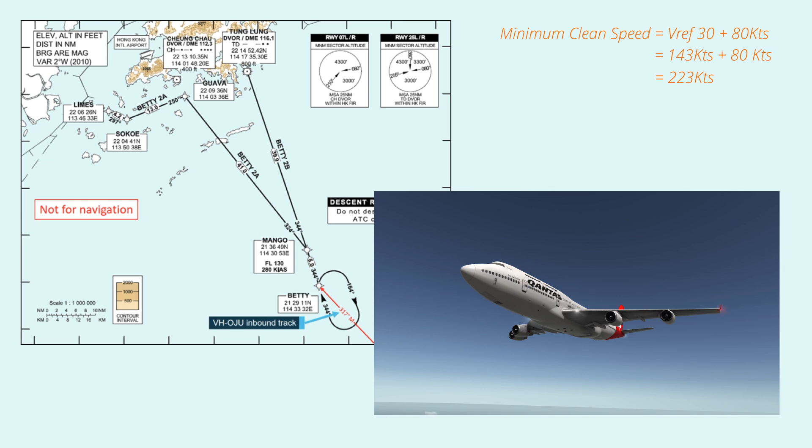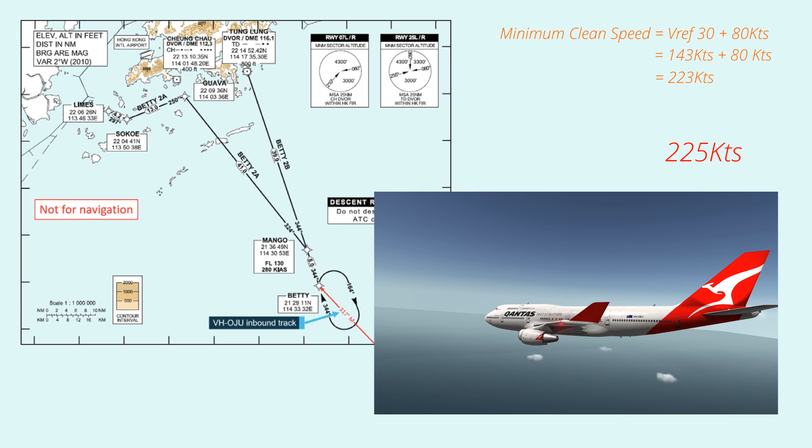With confidence therefore in the figures being displayed, the captain will subsequently instruct the FO to simply round the figures off and manually override the 223 knot figure with an intended hold figure of 225. This manual overriding of the FMC predictions is significant, as it instructs the aircraft to use this figure as its primary speed reference, even if subsequent events will cause the FMC to amend its initial calculations. And as luck would have it today, this is exactly what will happen to QF29.

Due to the congestion ahead, the descent from flight level 300 will be laboured and stepped. The significance here is that as the aircraft approaches the Betty intersection, while anticipating an entry into the hold at flight level 160, the aircraft will actually be 6,000 feet higher at flight level 220.

In preparation for landing, following direction from the flight crew, the customer service manager will advise the passengers to fasten seatbelts. However, of significance is the fact that at this time, the fasten seatbelt sign will not actually be illuminated.

As can be seen from the diagram, the published hold will require the aircraft to establish in a right-hand racetrack pattern, establishing inbound to the fix on a track of 344 degrees magnetic. At lower altitudes, this inbound leg is calculated by the onboard flight management computer to be 1 minute long. However, at intermediate and upper levels, this is extended to 1.5 minutes.

The aircraft will level at 220 as instructed and commence its right-hand turn to enter and maintain the given holding pattern. Almost as soon as it does so, events on the flight deck will take a turn for the worst, as various stall warning, aural and tactile alerts will begin to trigger. From a normal, uneventful descent scenario, the aircraft is now on the cusp of entering an aerodynamic stall and uncontrolled flight. But why?

The purpose of the stick shaker device is to provide warning to the flight crew that the aircraft is approaching an aerodynamic stall. As you've already seen, when activated, the stick shaker vibrates both control columns, providing an aural and tactile warning indication. The manufacturer's guidelines for recovery from such situations is outlined here and must be executed without delay by the respective crew member.

With first indication of the stall, the pilot flying, or the PF, will initiate recovery by holding the control column firmly, disengaging both autopilot and auto throttle, and smoothly applying nose down elevator in order to reduce the angle of attack until buffet or stick shaker stops. At the same time, the PM, or the pilot monitoring, will monitor altitude and airspeed, verify all required actions have been carried out, and call out any omissions.

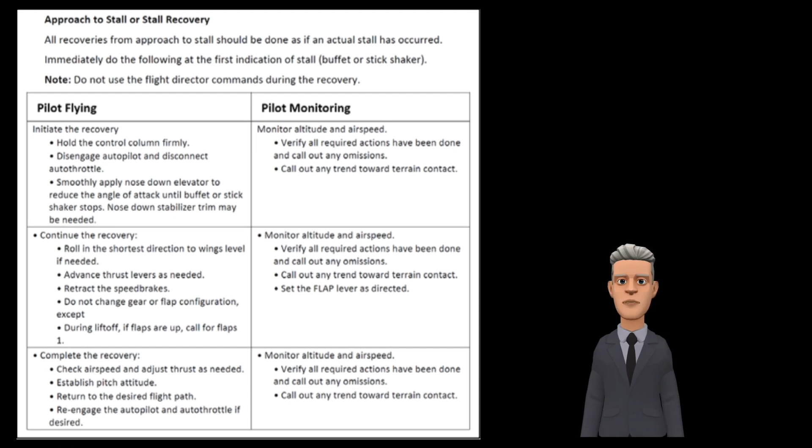Continuing with the recovery, the PF will roll the aircraft the shortest way to wings level, advance thrust levers as needed, and retract the speed brakes. He will also ensure that the current configuration with regard to flap and gear is not altered, in order to mitigate against the possibility of inadvertent drag increase. In completion of the recovery, the PF will check airspeed and adjust thrust as necessary, re-establish a positive pitch attitude while returning to the desired flight path, and finally re-engage automation as appropriate. Throughout, the PM will continue to monitor and call out any trend towards terrain contact.

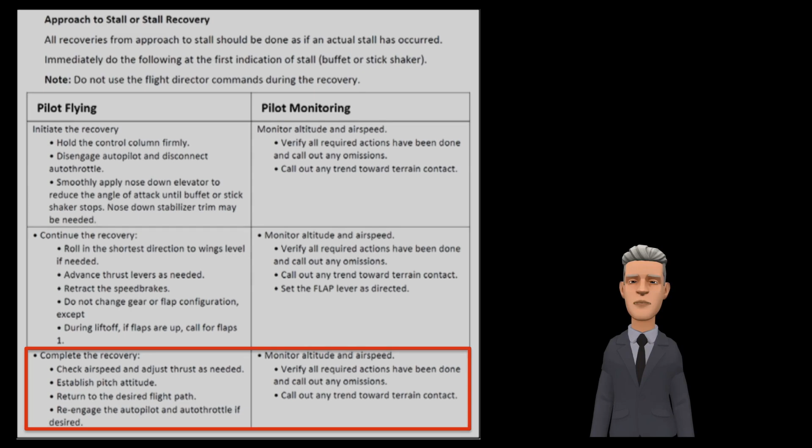During the pilot-induced oscillations, the customer service manager, who will be standing in the left aisle in the vicinity of row 64, will strike the cabin ceiling before falling on a seat armrest, sustaining injuries. 5 other cabin crew members in the aft of the cabin will likewise strike the ceiling. A passenger located in the aft lavatory will also strike the cabin ceiling before landing on the lavatory seat, this resulting in minor injuries to the passenger and damage to the lavatory fittings themselves.

A passenger in seat 63 Charlie, who will not have her seatbelt fastened, will also be injured. As the aircraft tracks on the outbound leg of the holding pattern, the smoke alarm in the damaged lavatory will activate. Upon investigation, the cabin crew will establish that there will be no evidence of smoke, fire or fumes, and that their belief is that the alarm is false, most probably activated by the damage to the lavatory itself.

As a result of their experience, the captain will request a priority landing from ATC, who in turn will immediately clear the flight direct to Hong Kong International Airport. With the remainder of the descent, this lavatory smoke alarm will activate on a further 6 occasions.

So what had happened to QF29 to so quickly bring it from a normal descent scenario to the point of it entering an aerodynamic stall and uncontrolled flight? Well, the answer is exactly that: aerodynamics. As an aircraft moves through the environment from the smallest to the largest, 4 specific forces act upon it.

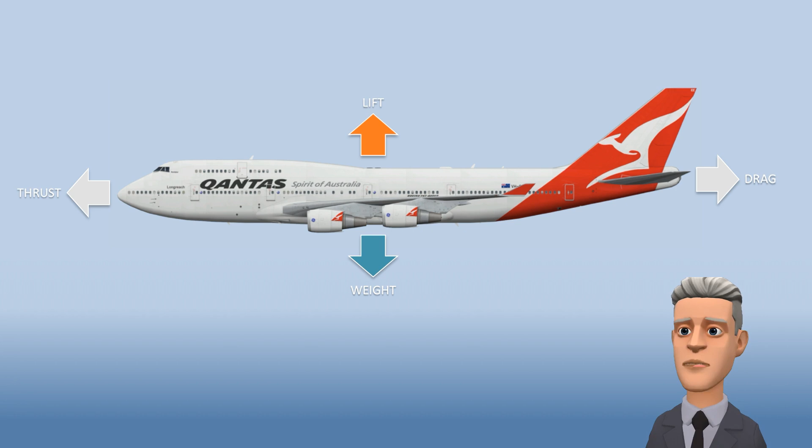When an aircraft is flying straight and level at a constant speed, the lift it produces balances its weight, and the thrust it produces balances its drag. However, this balance of forces changes as the airplane climbs and descends, as it speeds up and slows down, and, of particular interest to our study of QANTAS 29, as the aircraft turns.

In order to understand exactly what's about to happen to QF29, we need to explain a little more of the aircraft's aerodynamic model in the context of 2 significant events. Firstly, as the aircraft levels off from its descent, and secondly, having levelled off, what happens as the aircraft enters the right-hand turn to join the holding pattern. As we've already explained, in order to maintain level flight, the lift and weight vectors will have to be in equilibrium, which by definition isn't the case during descent. So as the aircraft levels off, this lift vector will have to be increased.

But how? Lift itself is expressed mathematically as being equal to a half rho v squared S CL, where rho equals the density of the air, v the velocity of the aircraft, S the surface area of the wing, and CL the lift coefficient of the aerofoil. Density, velocity and surface area pretty much speak for themselves, whereas CL, representing the lift coefficient of the wing, is a variable comprising of details relating to the shape of the aerofoil and, importantly, the angle of attack, or the specific placement of the aerofoil to the relative airflow.

In the given example of QF29, if the aircraft had actually levelled at the anticipated flight level of 160, the combination of holding at 225 knots plus an acceptable angle of attack would have produced the required lift to balance the weight vector, given the known density of the atmosphere at that level. However, the fact that the aircraft now enters the hold at flight level 220 means that the density of the environment will be significantly less, and thus the remaining variables of V, S and CL will have to be amended in order to compensate for its reduced value.

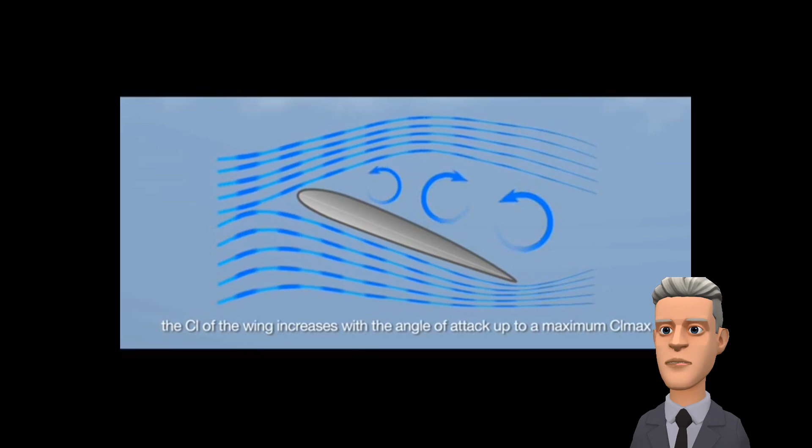As the angle of attack is increased, the CL, or the lift being generated by the airfoil, will also increase, up to a point. The angle at which this relationship fails is called the critical angle of attack, or CL max. Increase in angle of attack above this critical value and the airflow simply cannot remain attached to the wing surface. As the angle of attack increases, for a considerable period there is a linear increase in the value of CL. Approaching CL max, however, as the airflow begins to separate, the slope of the graph shallows.

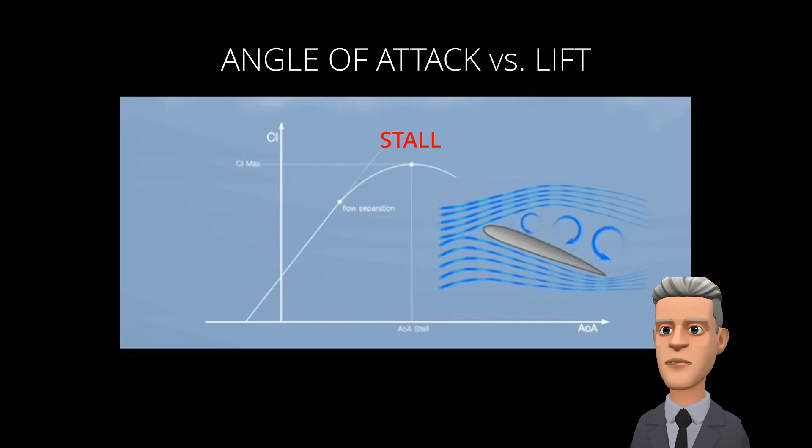At CL max, the lift being generated has reached a maximum. Any increase in angle of attack beyond this value will result in a sharp drop-off in lift with a corresponding increase in drag. The wing is now stalled. In order to recover from a stall, the angle of attack must be reduced to a value below the critical value of CL max in order that this separated flow can be reattached.

So as QF29 levels off at flight level 220, in reality the true correct holding speed should be 20 knots faster at 243 knots. Thus, due to the aircraft's slower speed, the angle of attack is being forced to climb ever higher, all the time reducing the remaining margin to CL max.

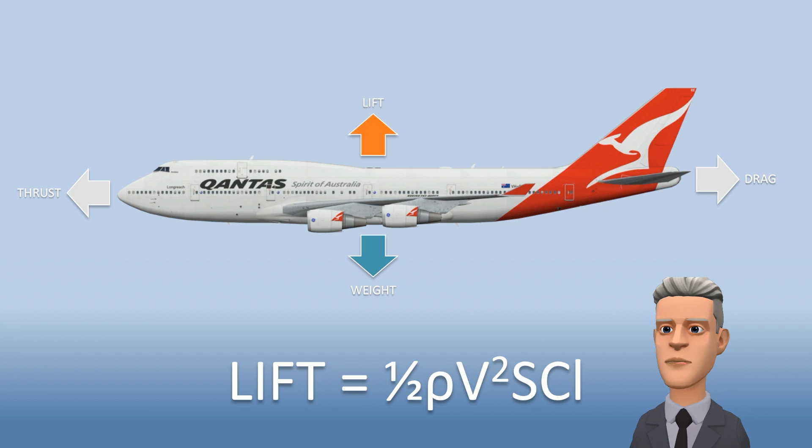Were the aircraft to continue straight and level, this compensation for the slow speed would most likely have gone unnoticed, but remember, this isn't what QF29 has been instructed to do. And it is its subsequent roll to the right which brings the aircraft to the edge.

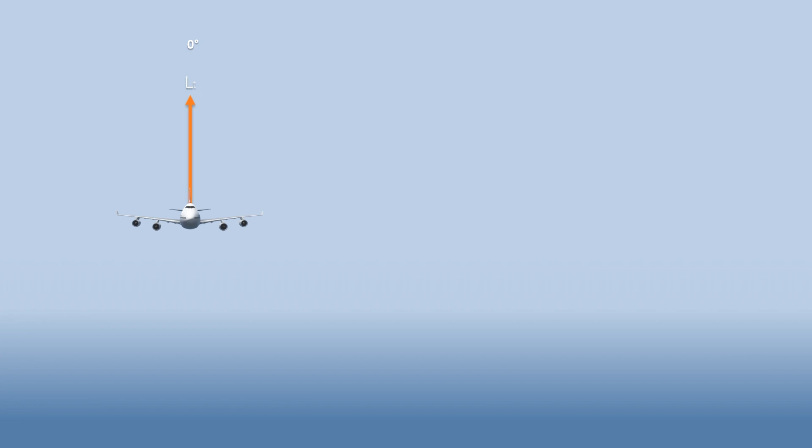As we've just stated, in level flight the total lift produced by the wings, shown here as the force Lt, balances the effect gravity is having on the mass of the aircraft, namely its weight, represented by Wt. So far so good. Now as the aircraft begins to turn, the total lift vector Lt will be orientated out of the vertical. One way to think of this is that the total lift vector will always act in a direction which is a straight line from the pilot's feet through his head.

Although moved out of the vertical plane, a residual lift vector will still remain. We'll indicate that here as LR. It is this resultant vector which is left to continue the job of trying to balance the weight vector Wt. Looking at the examples presented, it can be clearly seen that the more the total lift vector is orientated out of the vertical, the greater the impact on the residual vector. In other words, the more the pilot banks the aircraft, the weaker the residual vector becomes.

Needless to say, as the residual vector weakens, it will prove unable to adequately oppose and support the weight of the aircraft, and so, without intervention from the pilot, the aircraft will descend. So the question is, assuming that this descent is undesirable, as would most definitely be the case in a holding pattern, what can be done to compensate?

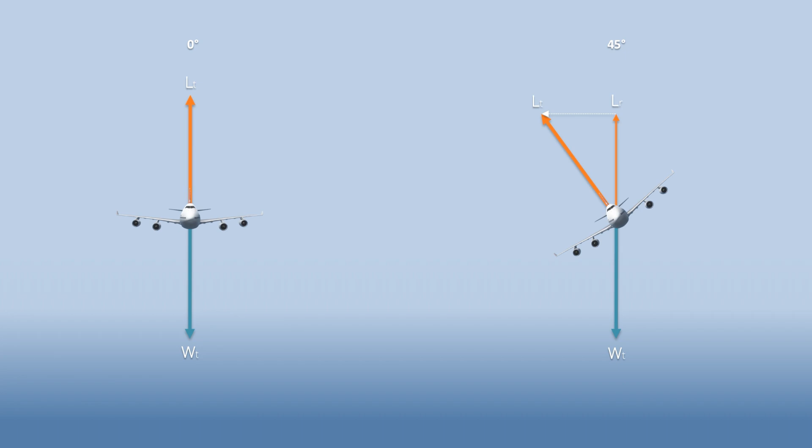Well, our problem is this. In order for the aircraft on the right to maintain level flight while in the turn, the value of LR will have to increase in order to balance the aircraft's weight. However, as LR is dependent on LT, what we really have to do is increase the value of LT, the overall total lift being produced by the wing. So how do we actually do that?

Well, back to the lift equation one more time. If our objective is to increase the total lift value, in order that LR correspondingly increases, then one or more of these variables within the lift equation must likewise change. But which ones? Simply rolling the aircraft into the turn from straight and level flight will do nothing to affect the density of the air through which the aircraft is travelling. Therefore, rho remains a constant.

We've already established that the speed of the aircraft has been fixed by the crew at 225 knots. And as there has been no extension of the leading edge or trailing edge devices, the area of the wing will have not changed either. Thus S will also remain a constant. Therefore, once again, the only remaining variable to play with in order to increase the total lift being produced is CL, or in other words, a change to the angle of attack.

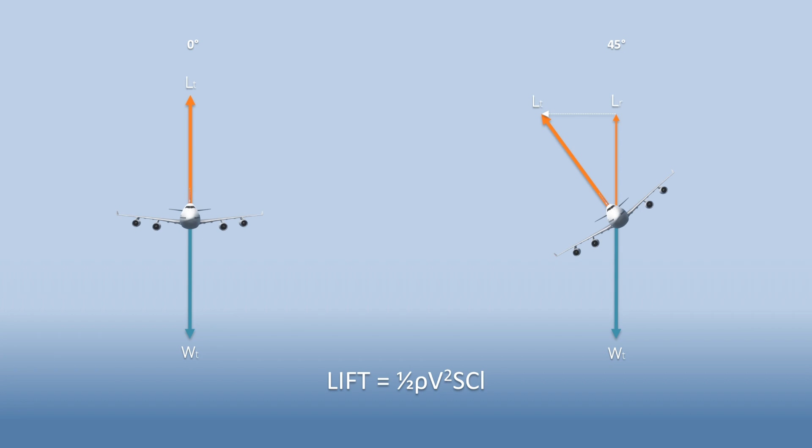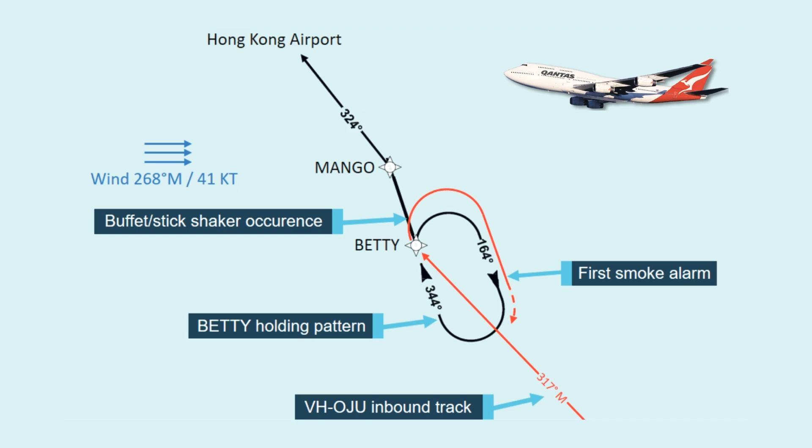Simultaneously, as the aircraft descends toward Betty, with both pilots being simultaneously distracted, neither will notice that the aircraft's speed will have reduced below the already slow target of 225 knots. This will thus reduce the v-squared element of the lift equation, forcing the CL component to compensate still further by continuing to adjust the angle of attack value upward. What slender margin remained beforehand to CL max will now have all but disappeared.

So again, to recap, if we mathematically display lift as being equal to a half rho v squared S CL, then 5 specific events collectively will conspire to bring QF29 to the brink. Firstly, the crew's manual insertion of a target speed of 225 knots was in itself not wrong, provided the aircraft was actually going to enter the holding pattern at flight level 160. At flight level 220, however, the reduction in the air density meant that in order for the angle of attack to be maintained at a reasonable level, with an adequate margin to the critical value of CL max, then the value of V, or the aircraft speed, would have to be correspondingly increased.

The FMC calculated target hold speed and target level are based on the aircraft's gross weight and programmed VNAV descent profile. Below flight level 150, this speed is based upon the flap 30 landing reference speed, with the addition of a speed increment. This increment varies with aircraft weight and is designed to provide a manoeuvring margin equivalent to a level turn at 40 degrees angle of bank, or 1.3 g of vertical acceleration. Above flight level 200, the FMC calculated hold speed corresponds to the minimum drag or most fuel efficient speed. Therefore, at flight level 220, calculations showed that the optimum holding pattern airspeed would have been approximately 240 knots based upon the event gross weight and not the 225 knots inserted by the crew.

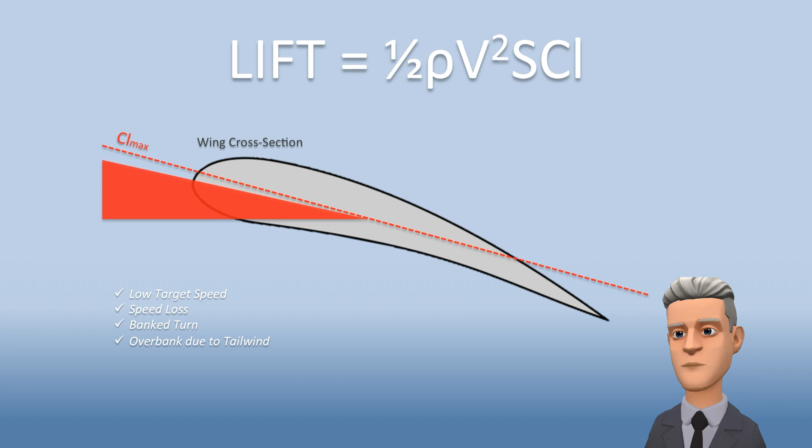Entering the turn, for the reasons mentioned earlier, the angle of attack will have to be still further increased in order to compensate for the reduction in the residual lift vector, as the total lift vector is orientated out of the vertical, proportional to the degree of roll. The effect of the sudden increase in tailwind component as QF29 commences its right-hand turn will cause the autopilot to deliberately overbank the aircraft so as to mitigate the possibility of the aircraft departing the protected airspace of the holding pattern. This again weakens the magnitude of the residual lift vector, placing still further pressure on the angle of attack being flown.

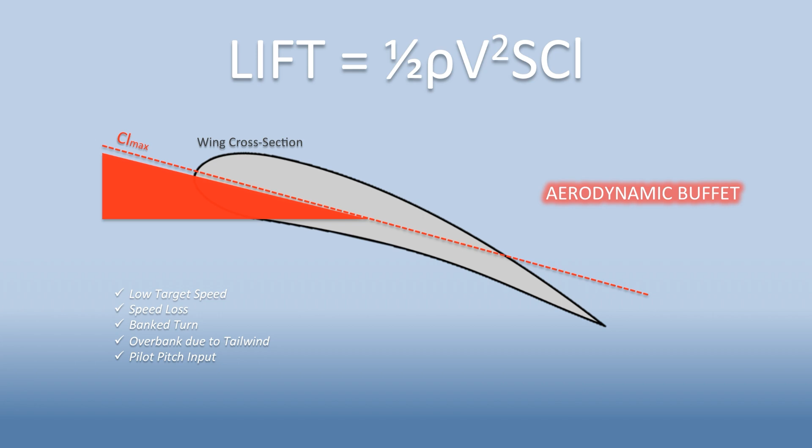As the margin to CL max is reduced, the airflow over the wing is beginning to separate, resulting in aerodynamic buffeting which can be felt inside the aircraft. Finally, in an effort to prevent further altitude loss, the captain's pitch up inputs on the yoke will reduce the margin to the critical angle of attack still further, finally triggering activation of the stick shaker.

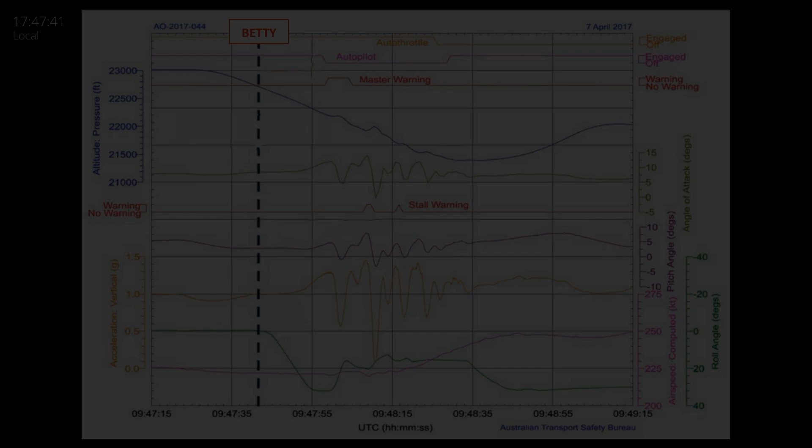Analysis of the flight data recorder will show that crossing the Betty waypoint and a commencement of the right-hand turn into the holding pattern, the aircraft was still descending and passing flight level 227 with an indicated airspeed of 224 knots. Due to the effect of the rapidly increasing tailwind component, for the reasons mentioned earlier, the autopilot commanded a bank turn of 32 degrees, far greater than the 25 degrees which would have been expected.

14 seconds later, a simultaneous increase in vertical acceleration, pitch and angle of attack can be observed as the autopilot attempts to level the aircraft to flight level 220. Due to the resultant increase in drag and the lethargic reaction of the autothrottle, the indicated airspeed decreases still further. This results in the generation of the airspeed low, master caution, and the simultaneous onset of pre-aerodynamic stall buffeting.

In response, the captain will disconnect the autopilot while simultaneously applying forward pressure on the yoke to reduce pitch and left aileron to reduce the aircraft's bank angle. In reducing the aircraft's pitch, this input will also have the effect of reducing both the vertical acceleration and angle of attack.

Noting that with the autopilot disconnected, the aircraft had continued to descend, the captain attempted to mitigate further altitude loss by reapplying back pressure to the control column, and as a result all three parameters of pitch, vertical acceleration and angle of attack increased once again. This finally brought the angle of attack to a value which resulted in the stick shaker being activated.

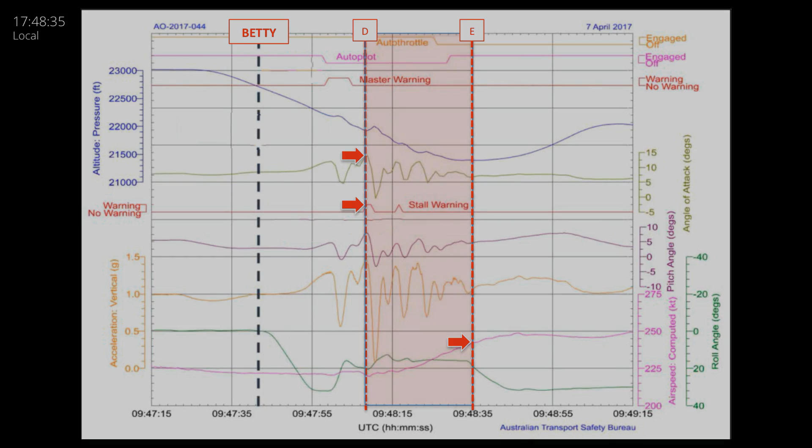Prior to arriving at Betty, the vertical profile in the flight management computer calculated holding at between flight level 150 and 160. When selecting a target speed, the flight crew verified the FMC calculated speed using the established rule of thumb. However, the flight crew training manual for the 747 advised that the computed holding speed, being presented under the given circumstances, would only provide for full manoeuvre capability to the stall warning activation at lower altitudes only, by definition this being below flight level 200 or 20,000 feet.

It transpired that the flight crew were not aware of the requirement to use a different verification procedure for altitudes above flight level 200. Had the crew recalculated the hold speed for flight level 220 using the flight management computer, it would have provided a target hold speed of 240 knots.

In this case, the flight crew likely did not have an adequate understanding of how the FMC calculated the target hold speed. They also did not understand the use of the best speed option provided for on the hold page of the FMC. The truth was that had they used the available best speed option, the FMC would have provided them with a hold speed for the actual aircraft weight, altitude and configuration at the time. This would have immediately highlighted a disparity between what should have been flown, that is 240 knots, and what was actually about to be flown, that being the 225 knots which the crew had previously manually inserted.

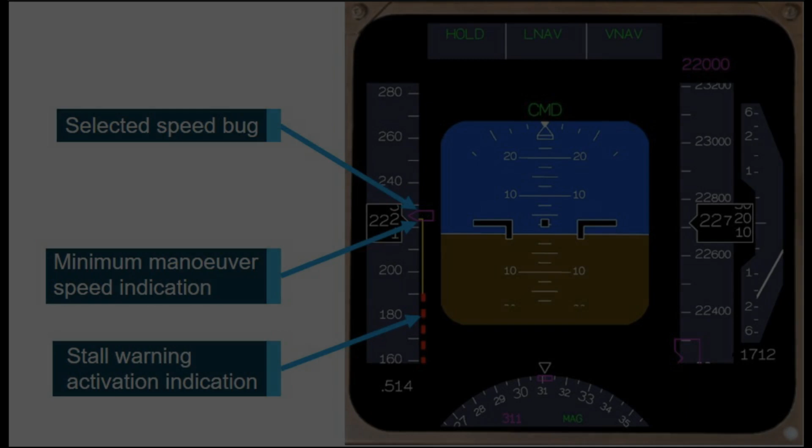At the time the speed was reducing below both the selected speed and the minimum manoeuvring speed, the flight crew's attention was focused elsewhere on other operational matters. The captain was busy reviewing the relevant navigation charts for their eventual approach into Hong Kong, while the first officer was actually engaged with looking outside of the cockpit for potential conflicting traffic as they entered the holding pattern.

As QF29 made the right-hand turn to enter the holding pattern, the bank angle increased, exaggerated by the effect of the prevailing wind, and the aircraft began to transition from descent to level flight. The accumulative effect of these manoeuvres increased both the aircraft's vertical acceleration and wing angle of attack, which in turn initiated pre-aerodynamic stall buffeting. At this time, although it was not captured on the flight data recorder, all flight crew members reported a stick shaker activation.

Subsequent examination of the recorded angle of attack at the time likewise confirmed that stick shaker activation did most likely occur. In consultation with the manufacturer, Boeing did concede that activation of less than 1 second in duration could conceivably fall between the defined sample rate, thus resulting in a failure to capture this data on the flight data recorder. At the time of the initial buffeting and probable stick shaker activation, the captain commenced the approach to stall and stall recovery actions required per procedure.

However, after this, a number of other actions required by procedure were not completed, including the following. Due to a desire to remain within the protected airspace of the holding pattern, the wings were not levelled. The auto throttle was not disconnected. And due to the captain's concern regarding the pitch-up moment resulting from a large engine power increase, engine power was not manually increased sufficiently to effect recovery. Furthermore, the first officer assessed that the actions had been completed correctly and thus did not identify or call out the missed actions.